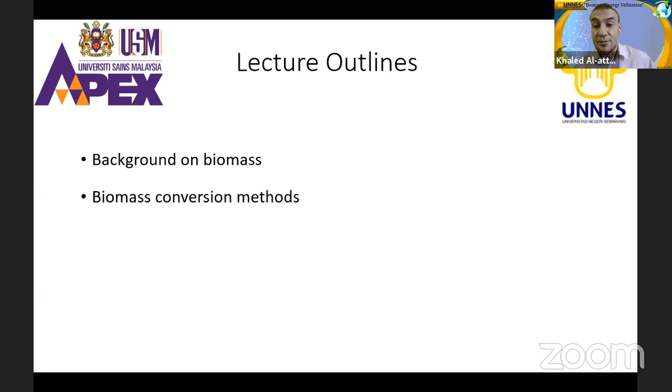So this lecture will include a general background on biomass definition, what is biomass. Then we'll have the conversion method, how to convert biomass into useful energy. Then we'll have the power generation from biomass. We'll discuss 2 ways to generate power, either using externally fired engines, which is actually the most common way to generate electricity from biomass, then the direct fired engines, which are usually not used or used for very small scale.

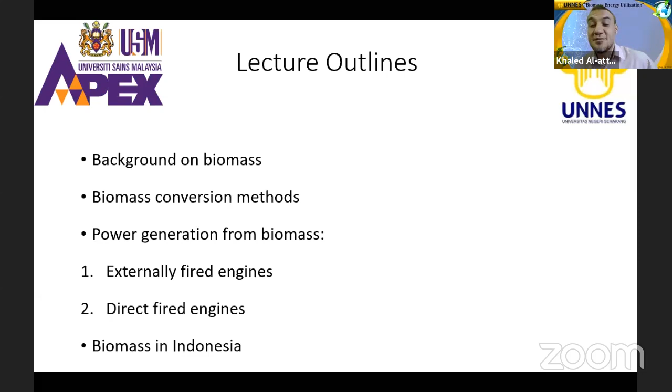Lastly, we'll have some background on biomass in Indonesia. I had a review paper with a lecturer from Indonesia, Dr. Jantar from Medan. The paper is still under review. So I got some information from that paper. So Bismillah ar-Rahman ar-Rahim. Let's start the background.

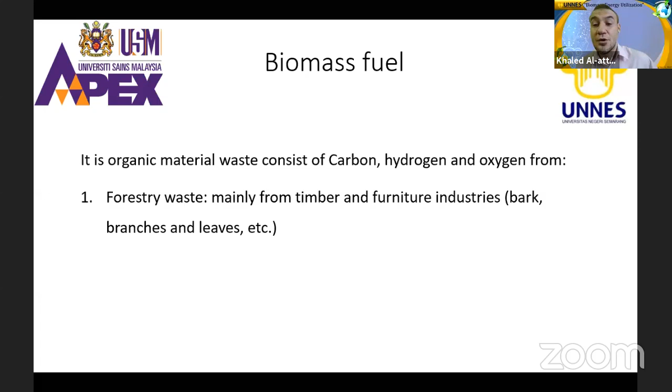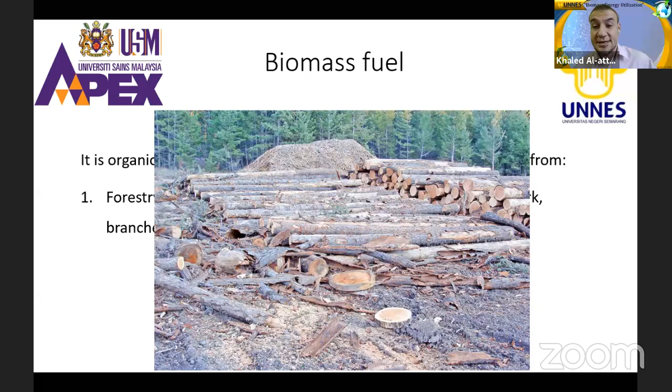So what is biomass? Biomass is any organic material, mainly consisting of three elements: carbon, hydrogen, and oxygen. The sources mainly are the forestry. You have many forests in Indonesia that help the furniture industry, timber wood cutting industry. So we have byproducts such as the leaves, the bark, the branches, usually cut on the site and not transferred. Only the wood is transferred. These waste materials are sometimes burned in open fire on the site, which is a big pollution.

Second source for biomass is agriculture waste from the palm oil industry. We take the oil, then we have the shell and other residues that are wasted. These are biomass waste, also from other industries like rice and sugar production. From sugar cane we have the bagasse. Bagasse is the dry fiber after you squeeze the sugar cane. And other agriculture industries have much waste that is not utilized. Sometimes it is burned directly to the ambient without utilization.

So the specific characteristics of this type, which is the forestry, it has very high cellulose and hemicellulose and lignin, which is very rich in oxygen. It's not like the normal fossil fuel. Normal fossil fuel, usually you have up to 90%, 80 to 90% carbon, and the rest is hydrogen, while oxygen is very few.

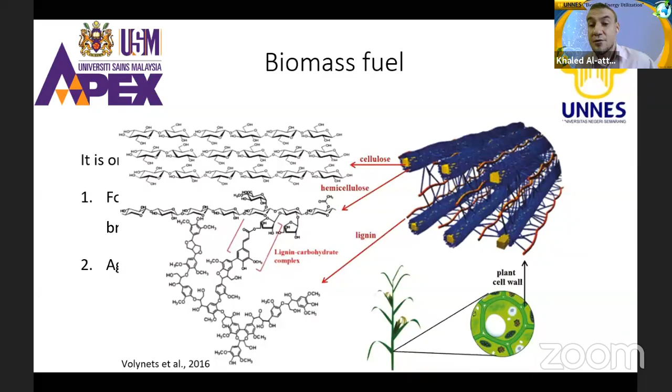In agriculture waste, it is a different story. The composition is quite different. You have very high sugar-based materials, such as cellulose and hemicellulose, which are very rich in oxygen. You can see here the links, you have many molecules of OH and O. So the oxygen is very high, while the carbon is low, from 40 to 50% only.

Then we have the third source, which is the animal waste. If you have a farm for raising animals, such as pig, cow, poultry, which is chicken, you have the waste from these animals in the form of manure or dung. This waste is very high, rich in hydrocarbon, which is carbon and hydrogen mainly.

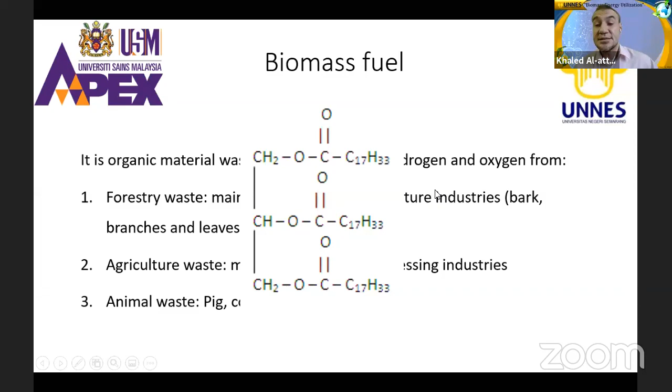You can see here the formula is different. It's not like the agriculture cellulose. Here we don't have cellulose. Cellulose is digested by these animals, so their waste does not include that. So the oxygen content is quite lower, while the carbon content from this type of waste is quite higher. We can see here, this chain is C17H33, a linear chain, so many 17 molecules of carbon, then up and down we have hydrogen. So the construction or structure of this waste is different from the agriculture waste.

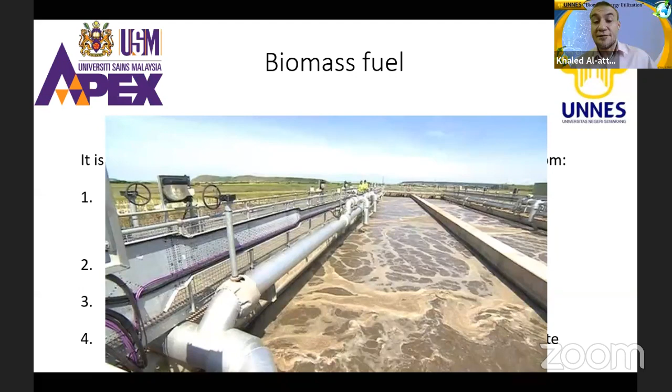Lastly, we have the human waste, in the form of sewage. The sewage is thrown with water, so it is very diluted with water. Then it is accumulated in the sewage treatment plant. This is a picture of a sewage treatment plant, where sometimes it is just left to evaporate with sun, or sometimes the water is pulled for water treatment, while the solid material is left to go down to the bottom and sink. After that, they collect the solid material.

The other waste we have is municipal solid waste. Municipal solid waste means any waste in your garbage. In your house, you put garbage outside. So this waste can be biomass or non-biomass. All that is called municipal solid waste, or waste from the city. It can be paper, metal, glass, plastic, or biodegradables like food waste.

So if you have recycling, you will make this utilization of biomass much, much easier. In developed countries, they focus on recycling inside, meaning in the building, in the house. You're not allowed to throw biodegradables, food, bones, whatever, mixed with plastic and with glass and with metal. You have to split. In developing countries, usually it is all mixed, then if you want to utilize it, you have to build an additional power plant or power station to separate them.

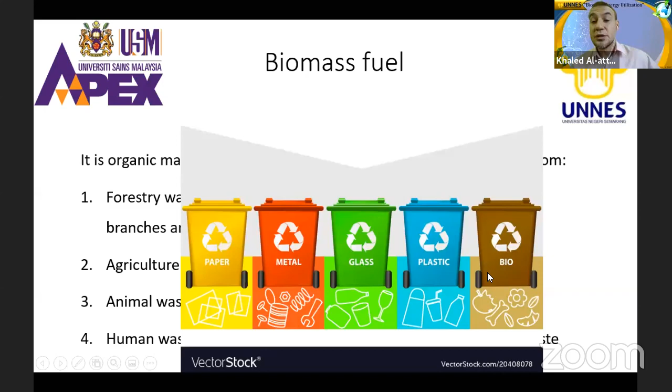So you have to separate the recyclables from the non-recyclables. Usually recyclables are the four from the beginning: paper, metal, glass, and plastic can be recycled, while the biodegradable can be utilized as biomass.

In most developing countries, we have landfill waste. We accumulate everything, just accumulate everything and put it in a landfill. This landfill is a big attraction for animals, rodents. You'll have rats, mice, cats, dogs, birds feeding there. If you have waste from a hospital, for example, this waste can be contaminated with virus and bacteria from hospitals. So whenever these animals go and feed there, eat the garbage, then they go back to the city, to the houses, and spread the disease.

So this is a very serious matter in terms of the environment, also in terms of health risk for the workers and for the areas around these places. You can see here, this is one of the landfills. Some countries bury the waste underground. Some countries burn it through open burning. Open burning will cause another issue, which is pollution from particulate matter, haze, and so on.

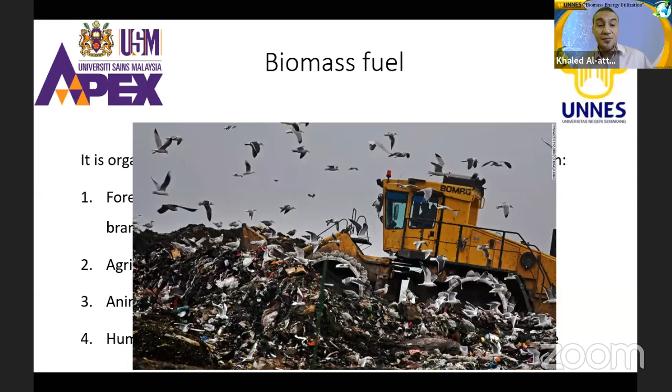So greenhouse gas and biomass, what is the relation? Is biomass good or bad? Is it good for the environment or bad for the environment? What's the relation between biomass and greenhouse gas?

Fossil fuels, as we mentioned, have high carbon content, so they generate more CO2 from combustion. It's usually 3 to 3.5 kilograms of CO2 per kilogram of fossil fuel. While in biomass, we have very low carbon content, 50%, 40%. So the amount of CO2 generated from burning 1 kilogram of biomass will be around 1.5 to 2 kilograms of carbon dioxide. Carbon dioxide is the major component in greenhouse gas.

Other gases also contribute, like methane and water vapor, all are greenhouse gases, but CO2 is the major one. So what is greenhouse? You all know, if you have a glass house in cold countries, they allow the sun to go into the house, then they don't allow the sun to reflect back.

So they keep the heat. They allow the sun ray to go in, but don't let it go out. This CO2 acts just like glass. It allows sun rays to go inside Earth, then when this sun ray or energy is reflected from Earth, it is not allowed to go back to space. So it is trapped inside the Earth, increasing the temperature of the world. You've probably heard about the global warming effect.

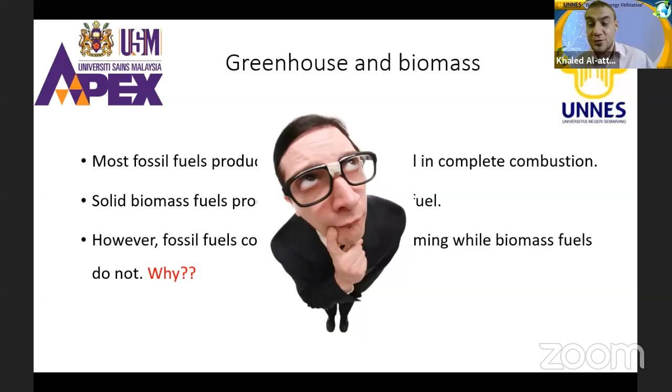I don't think we have time for an interactive lecture, so we'll just answer the questions directly. This is confusing: why does biomass not contribute to greenhouse emissions while fossil fuel does contribute, when both generate CO2 in combustion?

We can see the photosynthesis process is like a factory inside the tree. Every leaf of the tree has a factory that converts CO2 into carbon. Humans can do something like that too, with the Boudouard reaction to convert CO2 into carbon, but you need a lot of energy. The tree takes this energy from sunlight. This is called photosynthesis.

Whatever carbon dioxide, CO2, is in the air is taken by the tree and converted into carbon. This carbon is basically the fruit or the wood. This fruit or wood can be eaten by animals, then they burn it. Everybody has engines, millions of engines inside the body, that convert this fuel, biomass fuel, into energy, and the exhaust is CO2 again.

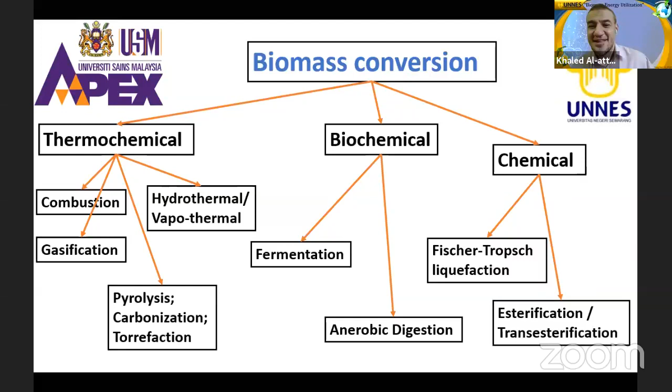Okay, am I going okay? Should I increase the speed or reduce the speed? Okay, the rate is okay.

First one is combustion. This is a thermochemical process, meaning we have heat and we have chemical reaction—both are needed for this process. But this one needs an additional agent, which in this case is air doing oxidization. So the chemical reaction here is known as combustion. Combustion is a special chemical reaction to convert biomass fully into carbon dioxide, CO2, and water. So this is full combustion.

However, biomass fuel has a problem when it comes to combustion. It's not like high-grade fossil fuels. So what are the issues when we want to burn biomass? First issue is the high moisture content. Biomass usually—if you have wood, wood is the driest, but still it has nearly 20% or 15% moisture. Other biomass has up to 90% moisture, which is extreme. So usually if you have like 90%, you cannot burn at all. You have to dry first, then you can burn. Why? Because water will take all the energy and you don't have any combustion.

Another downside is the hygroscopic behavior, meaning biomass, even if you dry it, tends to absorb moisture from the air. It's not like other materials that, once dried, keep the moisture as is. Biomass, if you dry in an oven then put it in the air for one day, it's already wet again. So it absorbs moisture from the air. This is another downside.

Another downside when you want to burn biomass directly is the low energy density. This includes the heating value being low and the volume being large—this is the relation between heating value and volume. So for a very large volume, you have very low energy. It's not like coal: 1 kilogram of coal can give you like 25 megajoules, while 1 kilogram of biomass could be from 10 to 19 megajoules.

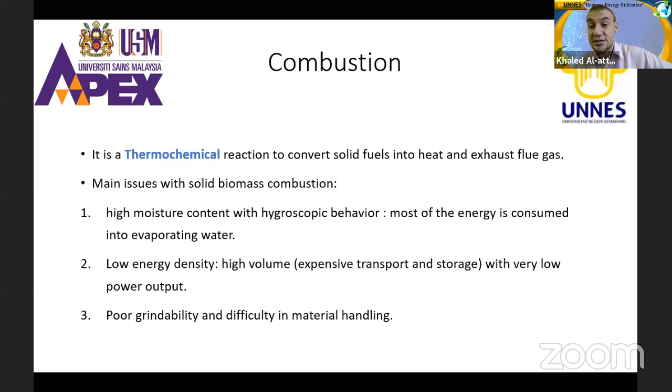Okay. The second process is pyrolysis. This is also a thermochemical process, but in this case we don't have any agent, just heat and chemical reaction, no agent at all. So you can do this one in vacuum. You can do this one in inert gas like nitrogen or helium that doesn't react. So pyrolysis is a decomposition. Mainly, if you put biomass and you heat it, it will decompose.

So pyrolysis has different types depending on the temperature and the time. The common one is slow pyrolysis, which is counted in minutes. If you have low temperature, 400 degrees Celsius, you will have carbonization. If you have less than 400 degrees, you will have torrefaction. But if you increase the temperature to 600 degrees, you start to decompose biomass into gas and oil. This oil is known as bio-oil. Okay, so pyrolysis does not need any medium. It can occur just with the biomass and the heat.

No medium required. Other novel types are fast pyrolysis and flash pyrolysis. Fast pyrolysis is from half a second to 5 seconds, mostly generating gases and oils. Flash pyrolysis is less than 1 second, meaning you drop biomass in a heater with very intense heat, and it volatilizes instantly and changes into gas. So flash pyrolysis is a continuous process. You just pass biomass and it devolatilizes directly into gas.

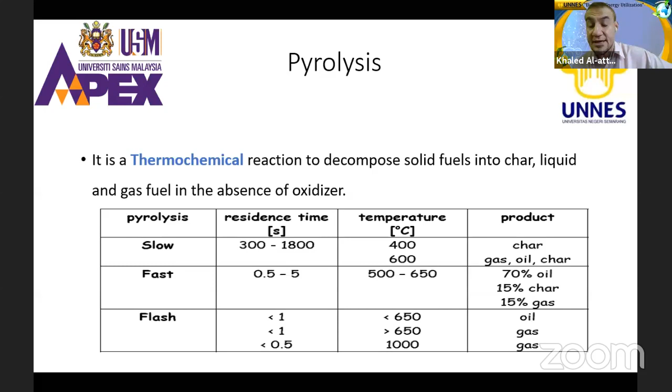Then we have the subcategory of pyrolysis, as we mentioned before, which is torrefaction. Torrefaction is a way to upgrade biomass. We saw before the downside of biomass is low energy density and high moisture. If you want to upgrade biomass into a good quality fuel, but it's still not charcoal, it's still between charcoal and biomass, you do something called torrefaction.

So torrefaction is a slow pyrolysis, but with very low temperature. You need only 200 to 300 degrees Celsius for an extended time. No atmosphere, no oxygen. You don't want oxidization. You can have nitrogen or helium or just a vacuum or a closed chamber. Then you'll have torrefied wood, which is a brown wood. It's not black yet, it's brown color.

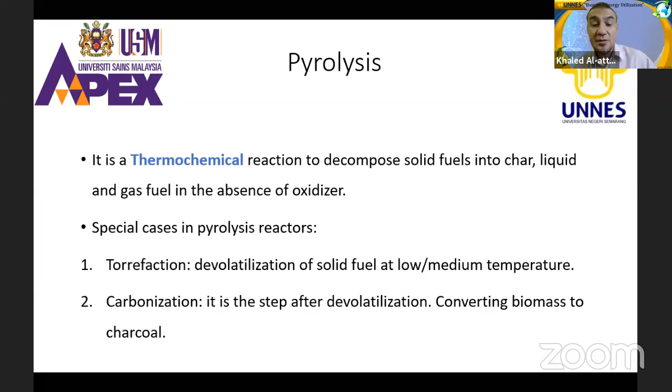Then you have carbonization, which is the charcoal production. You have many factories to produce charcoal. So charcoal production is a slow pyrolysis process at around 400 degrees Celsius up to 500 degrees Celsius. You don't have any medium. You cannot introduce air, otherwise you have oxidation and combustion. So carbonization is the next step after torrefaction.

Gasification is the most common way to convert biomass into useful gas. That's why the name is gasification, meaning you convert solid to gas. So gasification is also a thermochemical process, but it has an agent. The agent could be air, oxygen, or another type of agent such as steam or CO2. That's why in some papers you have confusion. Some researchers call CO2 gasification pyrolysis. They don't call it gasification, because what is the line between pyrolysis and gasification?

Gasification, some people call it partial oxidation. This is only if you use oxygen or steam or air. But if you use other agents, it is stepping towards pyrolysis. So if you use CO2, you have a reaction called the Boudouard reaction that converts CO2 with biomass into a gas. This gas is known as producer gas or syngas. Syngas is the synthesis gas. This was first introduced in the early 1900s.

They did coal gasification. So syngas is basically hydrogen and CO, carbon monoxide. You have diluted syngas if you have nitrogen and CO2 added. But producer gas is a special case of syngas, which is diluted syngas from biomass gasification. Okay. So when air is used, you introduce nitrogen. Nitrogen is not combustible, so you dilute the fuel, and the fuel quality becomes very low.

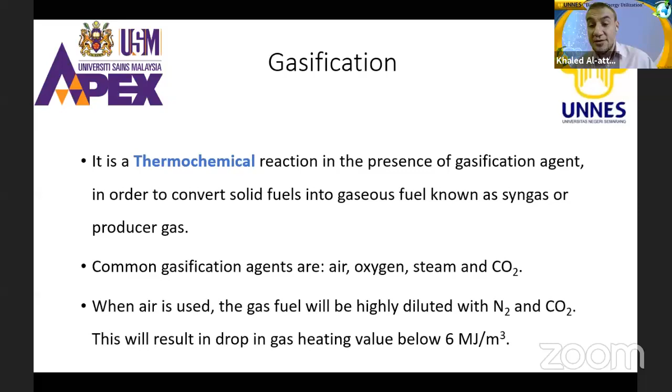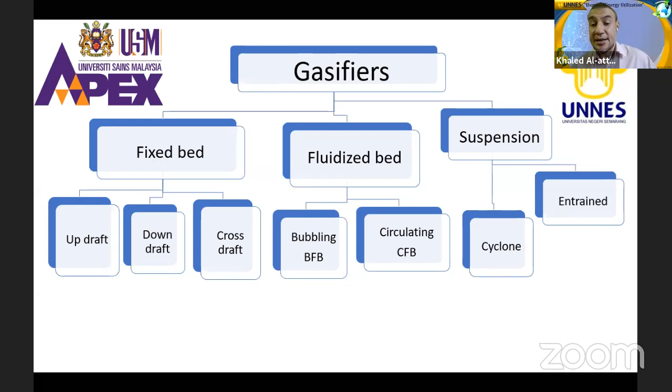Okay, so the gasifiers: we have the fixed bed, which is the batch type. We have updraft, downdraft, and crossdraft. We have fluidized bed, which is a moving bed with continuous feeding of fuel. It's not batch type. Then we have the suspension, which is either cyclone or entrained, for large scale coal gasification.

So we can see here the power scale. For fixed bed, downdraft gasifier is the most common with IC engines, since the gas is clean; it has low tar and contamination. So it's usually used for IC engines, internal combustion engines. So downdraft is between 10 kilowatt up to 1 megawatt. Then updraft has high tar content, so it's not useful for engines, but it's useful for boilers. So you can have heat for a boiler. So it is usually in boilers, large scale, 1 megawatt to 10 megawatt.

Then you'll have the fluidized bed. It is a very high energy density device, so it can be small, but very high energy. Fluidized bed can be circulating or just bubbling fluidized bed. So you have a sand bed, then you blow the air, then everything starts to bubble like boiling water and mix the hot sand with the biomass.

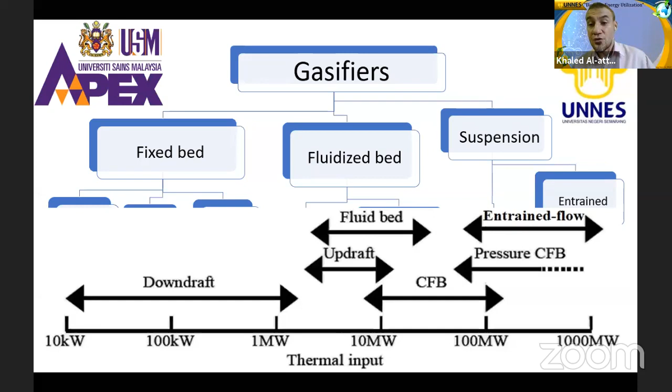Then you have the entrained gasifiers, usually only for coal gasification with very high intensity. So in this case, you use pulverized coal, like powder-shaped coal, and you throw it in with very high intensity.

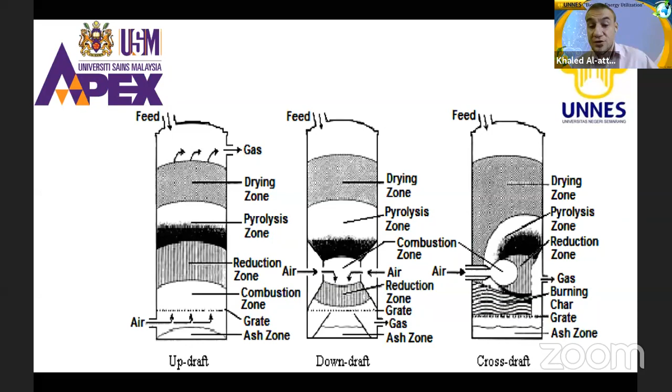So this is the reaction inside a downdraft gasifier. You have the biomass. You dry the biomass first, then you will have the vaporization from the biomass, water vapor, and you have the air. So whenever you introduce the air, you will have the combustion zone. So the combustion zone is just a generator for heat. It generates the heat for the other zones.

So the gasification zone takes heat from combustion and takes some oxygen. The pyrolysis zone takes some heat from combustion, but doesn't have any leftover oxygen. Drying takes the least heat and no oxygen. So all take from the combustion zone. So this is for downdraft air gasification.

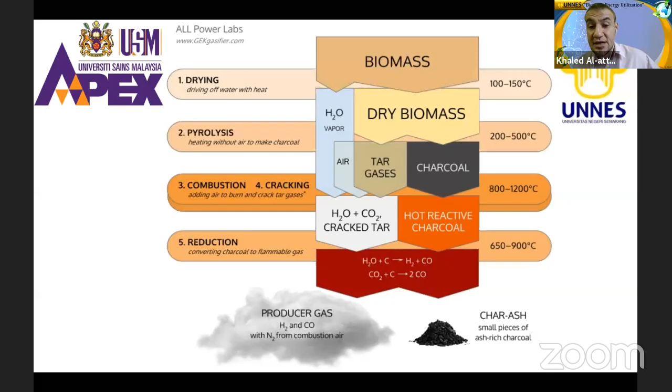Okay, biogas is the biological or biochemical conversion. It is anaerobic, meaning not aerobic, meaning no air. You just put waste food or waste from animals, manure from cow or from chicken, and you store it and let the bacteria do their work. So it converts into biogas. It can be a batch system, a simple container underground; you put all your waste in and you shut it for a month. Then you open it, and you'll have biogas there. It is cheap, but it is not efficient.

Or you can have continuous feeding with tanks and stirrers and so on. You can have different bacteria. If you run between 20 to 40 degrees, you will have lower efficiency. If you run between 50 to 70 degrees, you have a different type of bacteria with higher efficiency. Then you'll have either single stage or multiple stage. Commonly now they have multiple stage continuous flow with many temperatures, so you can utilize different types of bacteria.

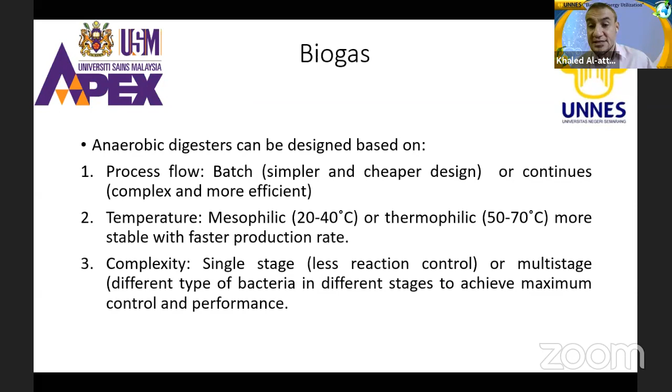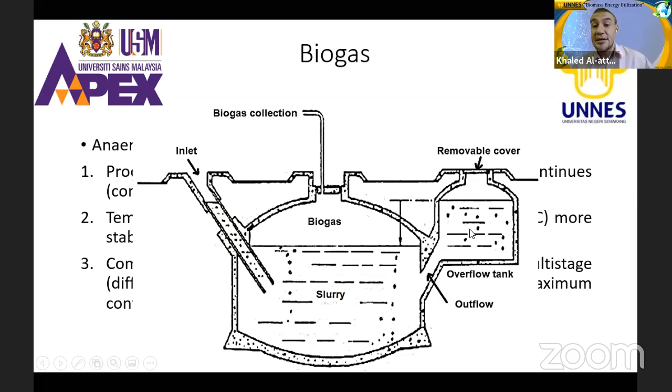So we can see here, this is a simple batch type digester. You put the waste in from here and you close the cover, then the bacteria start to work and convert it by fermentation and by degradation. Digestion is just like in your stomach. So bacteria generate biogas, which is mostly methane. Then the manure or the leftovers can be used as fertilizer for the plants and for soil. Biogas has a problem: contamination with hydrogen sulfide, which is corrosive.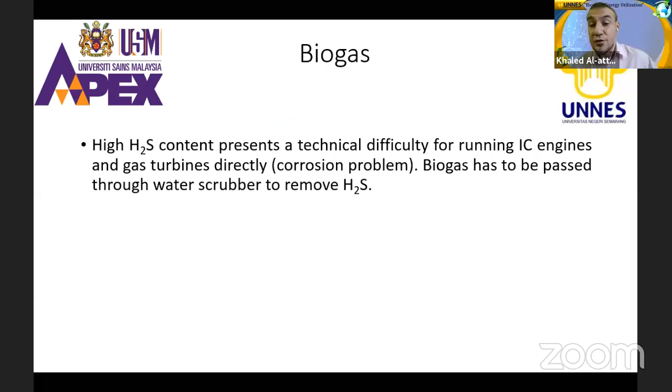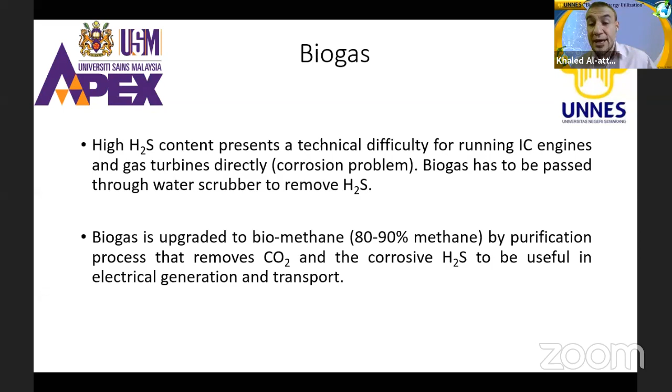So you have to clean hydrogen sulfide first before you can use this gas in an engine. Also, it has CO2, so you can absorb CO2 using lime or other methods. So you can upgrade the biogas into biomethane. Biomethane is the upgraded form of biogas, so it can be used directly in an engine.

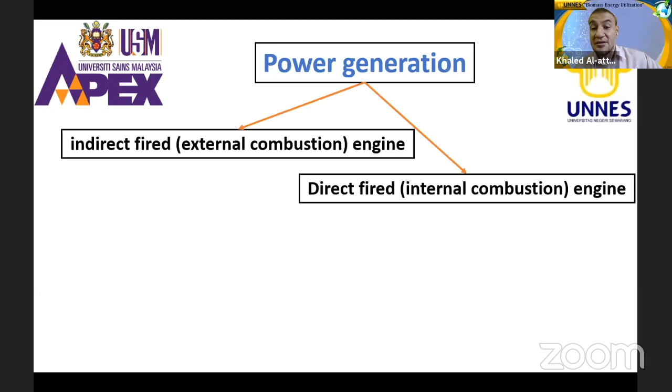Power generation: we have direct firing and indirect firing. So indirect, or externally fired engines, and direct, or internal combustion engines. In externally fired engines, we have the steam boiler. It is the most common externally fired engine for biomass. Like 90% of the biomass utilization in the world is steam. Very rarely do you find other types.

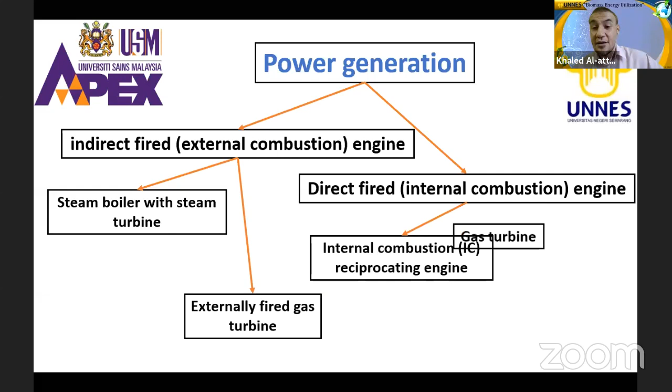Then you have the externally fired gas turbine. This is nonexistent, only prototypes and pilot scales. Then you have direct firing in an IC engine with a gasifier. Then you have gas turbine direct firing. Okay, so externally fired engines, you can see here we have a furnace. It's not a combustor, it's a furnace, it's atmospheric, it is simple, it's like a boiler. Then you have the tubes and you heat them by biomass.

So this medium could be steam, could be air. If it is steam, it is called the Rankine steam cycle. If it is air, it is called the externally fired gas turbine cycle. Same idea. So you increase the enthalpy of the fluid, then you expand this fluid in a turbine. This turbine could be a steam turbine or a gas turbine. Then if you let the gas or the fluid out, it is called an open cycle.

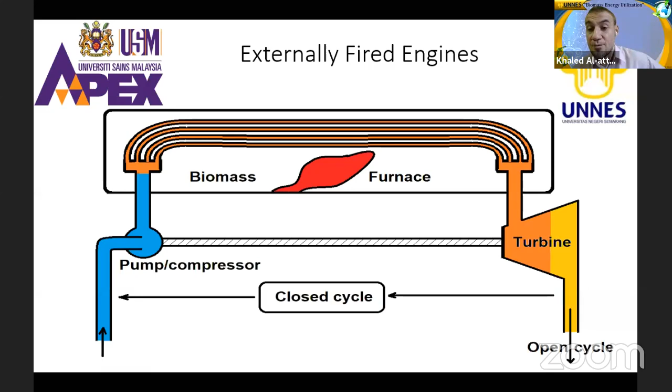Steam cannot be let out, so steam is a closed cycle. You recycle the steam back, using a condenser here to cool it back down to water. Then you have a pump. This pump takes the energy from the turbine, either directly with a shaft or indirectly with electricity. So in a steam cycle, we have a pump. In a gas turbine cycle, we have a compressor because we compress air. So this is the externally fired engine.

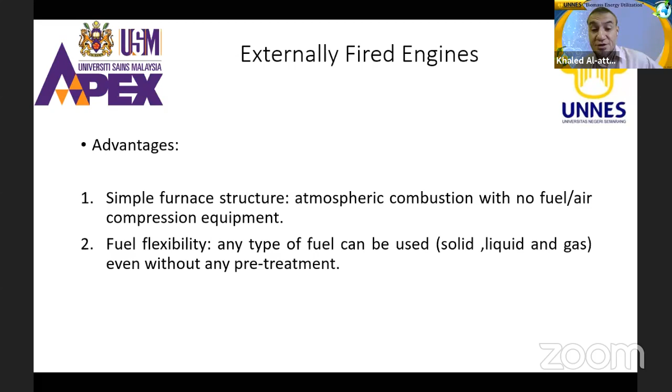The advantage of this engine is that it is a simple atmospheric furnace that can use any type of biomass. Even non-treated biomass can just be thrown in the furnace and burned. So it's a very simple type. No compression for the fuel, no injection, no automation, nothing. Then you have fuel flexibility, which we just talked about. Then both open and closed cycles can be used. The closed cycle has the advantage of pressure.

In steam, you can utilize the pressure using the closed cycle. You don't have atmospheric pressure, so you can do a very extreme vacuum inside the turbine to utilize more pressure. And in a closed cycle you can reach much higher pressure since you are not bound to atmospheric pressure. Once you have high pressure, the equipment always becomes smaller. High pressure means low volume. So you can have a smaller turbine in a closed cycle, while in an open cycle you cannot.

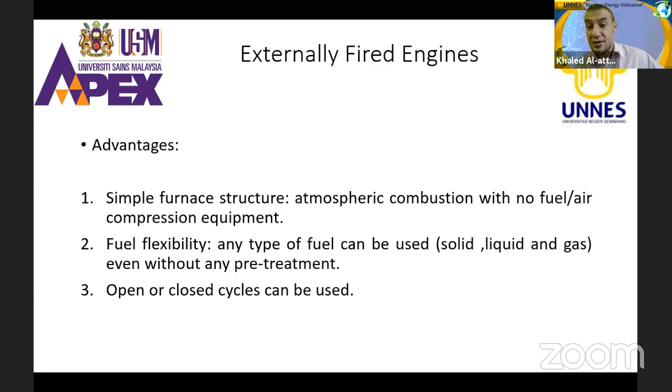The disadvantage of the open cycle is that the temperature is limited. For the externally fired gas turbine, this is a problem since a gas turbine needs high temperature, above 1000. But with an externally fired gas turbine, you only get 700 to 800, which is very low. But for steam it is not a problem. Steam is usually at most 500 degrees Celsius, and you can get that easily with a boiler. So this is not an issue for a boiler, but an issue for a gas turbine.

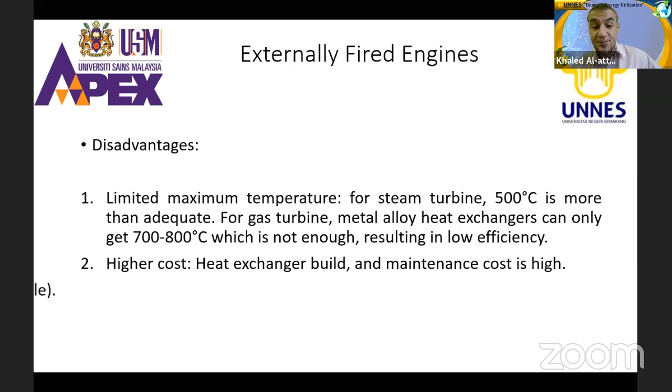Then you have the high cost of the boiler, of the heat exchanger. Then you have the safety concern. If you have a boiler, you have to call DOSH, the Department of Safety, every year. You cannot live happily. You have to have your boiler inspected every year. So it is a safety concern. Once you have a high pressure boiler, you have to call DOSH, the Department of Safety.

Then lastly, this is not practical for small scale. It is usually above 100 kilowatts at least. Steam boilers are usually not efficient at small scale. So for small scale, we can use the other type, direct firing.

So the externally fired gas turbine, this is my baby at USM. I started with this one back in 2005. I did my master's on this one. We got very low temperature and we couldn't start the turbine, so it was a failure. Then in 2014, a PhD student came. I was supervising him. He built a 6-meter high heat exchanger and he managed to get 860 degrees Celsius air temperature.

And the turbine successfully started, but you can see here the installation. This is a 6-meter high chimney, then a 2-meter system, then 8 meters, the whole thing. Every time you want to install it, you have to call a very big crane there.

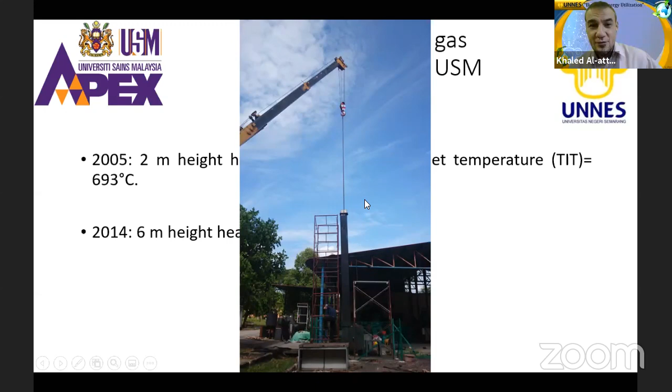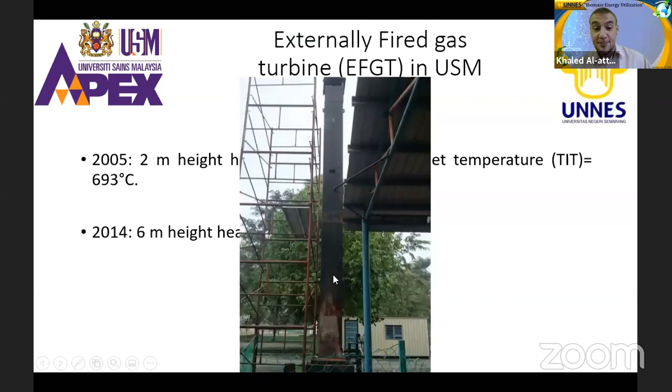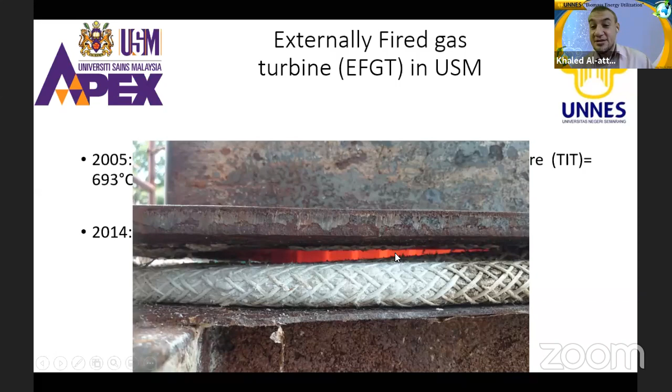So this is the system. It is a gasifier combustor system with stainless steel heat exchanger, which is 6 meters high. The temperature is very high. You can see here, we left some space for the turbine to go free, so the heat exchanger can expand. But still, you can see here, the heat exchanger is red hot, so it pushes the chimney up. It expands very high. Unfortunately, at 870 degrees, this heat exchanger melted.

So this is the downside of externally fired gas turbine. It is very expensive. It is still in pilot plant. Nobody is doing this one because it's a very expensive business. So we have to redo this part again.

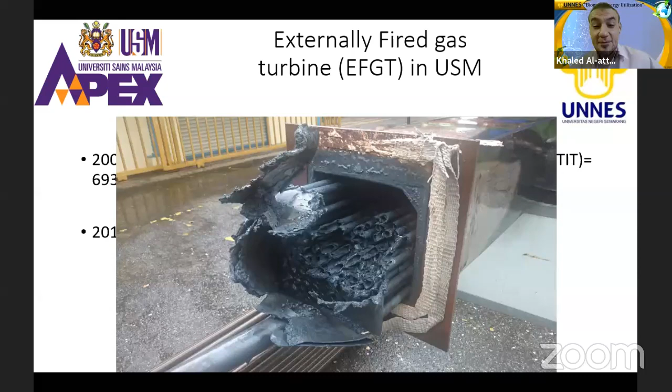So in 2018, another master student came and we did a new idea, which is called humid air turbine. It means we combine both externally fired steam and air. So you inject steam and you have air. So both will give you energy. Steam has the advantage, it doesn't need very high temperature. So a combination can work. So far, still not very successful.

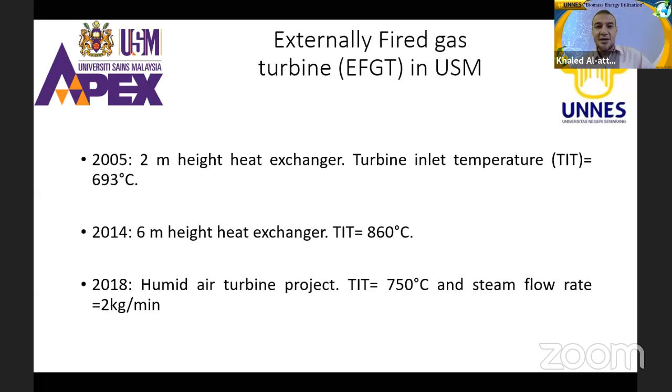It's a very difficult project.

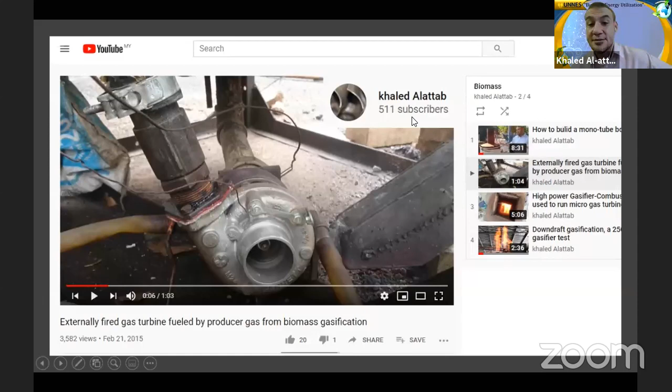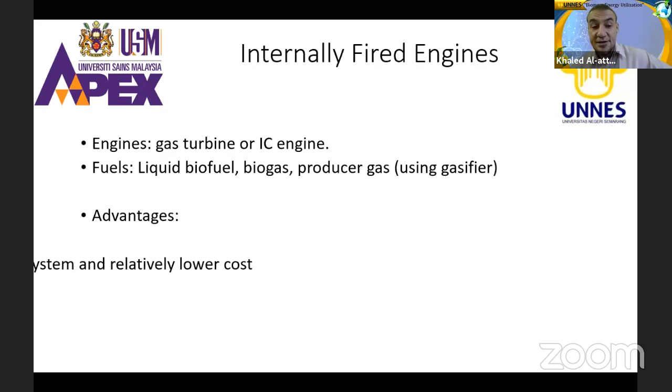Internally fired engine can be with IC engine or gas turbine. So the fuel could be very flexible, liquid fuel, gas fuel, or biogas. So advantages, it is a compact system with low cost. It is more suitable for a small size. So we have in USM this type.

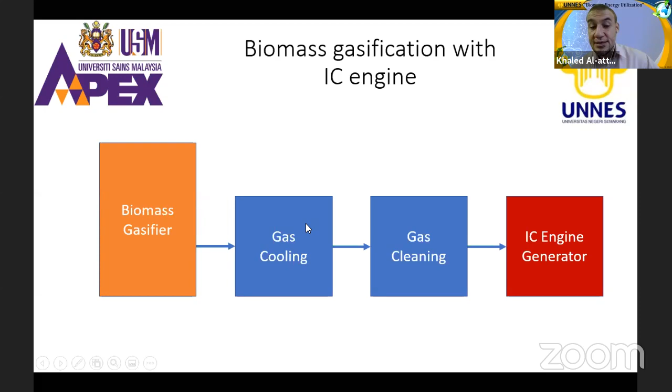We built in USM. We have a gasifier, then you have the gas cooling, then you have the gas cleaning, then you have the engine. For the engine, usually the gas enters at 40 degrees Celsius and we clean it from tar first. So it has elaborate gas cleaning and gas cooling before the gas can run the engine.

So we have a commercial offer in USM, a 5 kilowatt system ready for order if you want to order. Also, for lab demonstration, we can build for you a 5 kilowatt ready system, downdraft gasifier with the cleaning and cooling system and the engine.

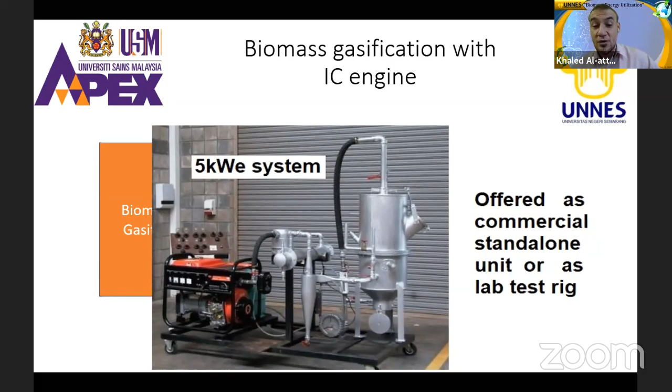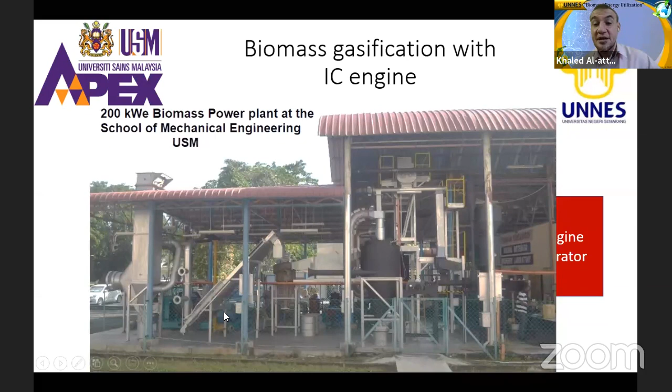Also, we have a biomass power plant, still not running yet. It is a 200 kilowatt power plant. It has 3 gasifiers. And this is a very elaborate cooling and cleaning system you can see here. Then we have the engines, 200 kilowatt engines.

So the more economic type is to pressurize the gasifier. It means you pressurize the air, clean air. You don't pressurize the fuel because the fuel is contaminated with nitrogen. So it will not be economic for you to pressurize the fuel. So you pressurize the gasifier.

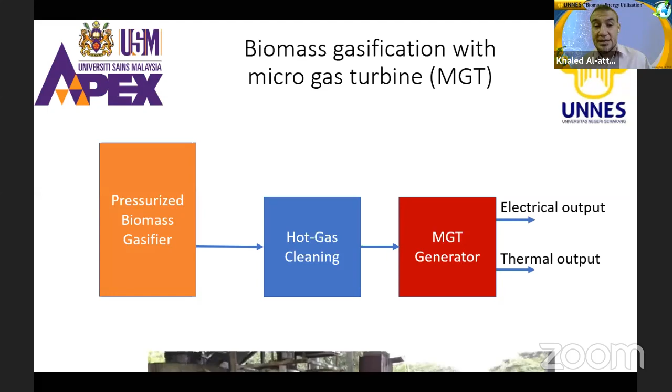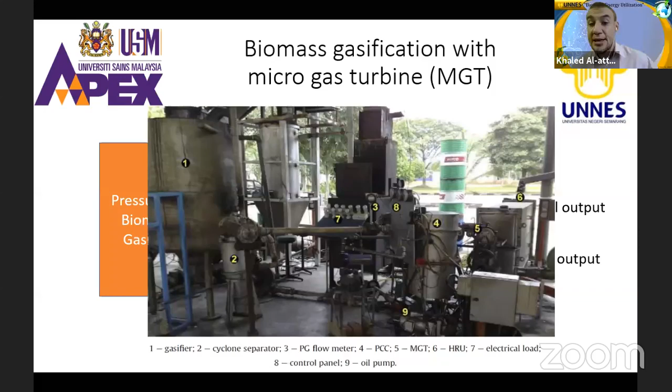This is a system built back in 2008 using pressurized downdraft gasifier and two-stage micro gas turbine with a cyclone separator and heat recovery. So this one was a pilot plant, 1 kilowatt electricity and 35 kilowatt hot air.

Then you'll have biomass direct firing with IC engine with liquid fuels. We have many engines running in the IC engine lab. I don't have pictures. Also, we have a micro gas turbine running with liquid biofuels.

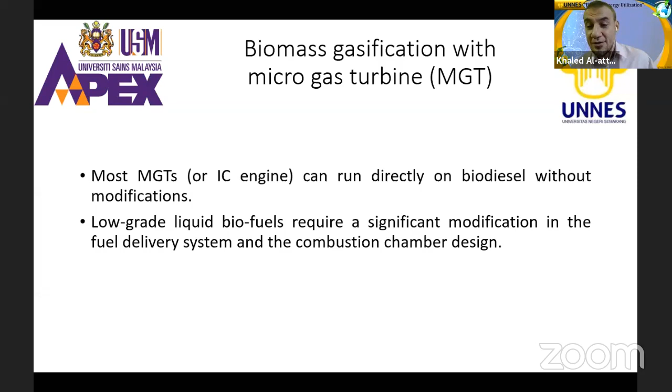It's much easier. You don't have to convert to gas or anything. You just use the liquid fuel directly. So the liquid biofuel usually does not need significant modification on the chamber unless it is low grade. So you have to modify the gas turbine or IC engine chamber to cope with the higher viscosity. Usually these lower grades like palm oil have very high viscosity, so you cannot pump it and spray it easily.

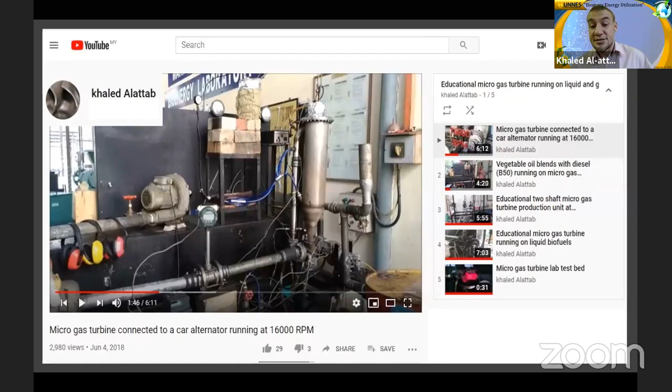This is another project finished last year by a PhD student. He did liquid biofuels with a microgas turbine engine. You can see it on YouTube. We managed to run 100% palm oil fuel with this gas turbine engine. So you can go to my channel and watch the different experiments with this microgas turbine engine.

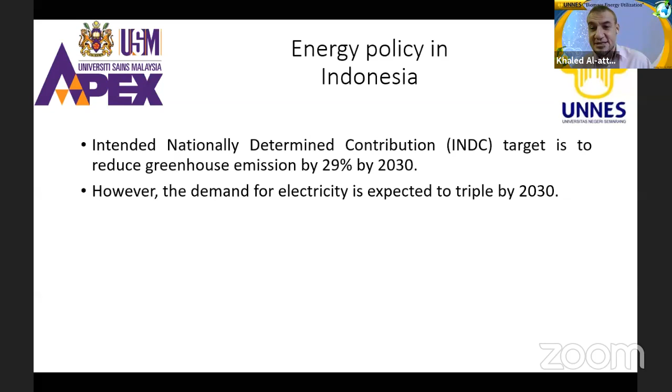Okay, so how to achieve this target? You can see here, the electricity demand with the population is increasing very fast. Some researchers say that by 2030, the electricity demand in Indonesia will be tripled, three times the electricity demand as now. So how to reduce CO2 emission while the electricity demand for power generation is increasing? You can refer to the Energy Outlook of Indonesia 2019, this is the link, or the Statistical Yearbook of Indonesia 2019 for the statistical data.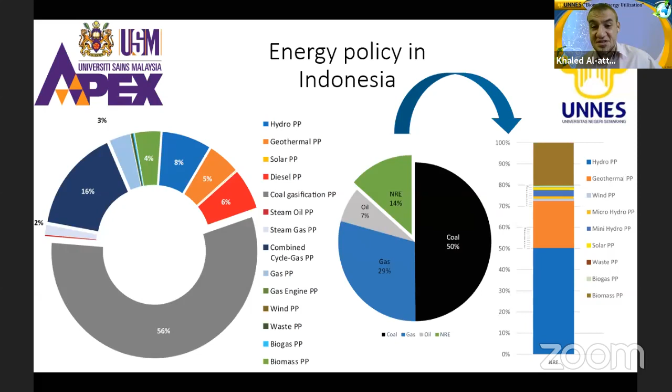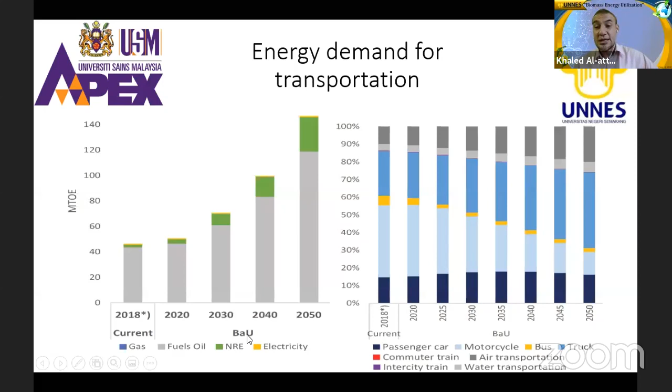So these guys in Indonesia Outlook did simulation and they simulated 3 cases. The first case they call business as usual, BAU. So if you keep doing as you are now, this is the result. Then they simulated other cases, low carbon case and sustainable case. If you go with the low carbon case, change the policy, you can achieve this target of 29% CO2 reduction by 2030. If you keep the business as usual model, it's not expected that Indonesia can achieve the greenhouse target.

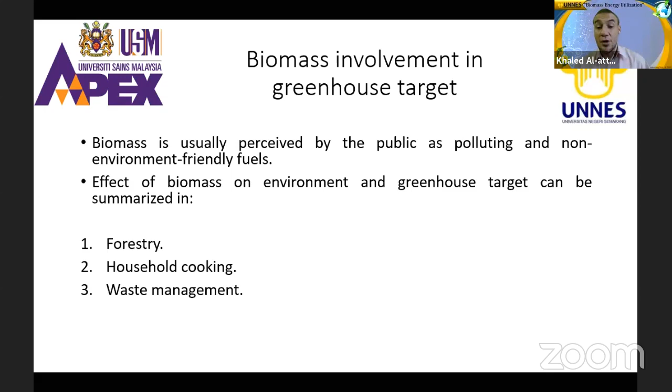So on biomass and greenhouse, the public usually views biomass as a dirty fuel. Biomass is misused, not used correctly, so it is a dirty fuel. But if you use it correctly, it's not a dirty fuel. It's a very environment-friendly fuel. So the issues with biomass, we have here the effect of biomass on greenhouse. We have forestry. You have household cooking. You have waste management; we already talked about the landfill and so on. Then lastly, we have liquid biofuels and power generation.

So forestry, as we mentioned before, if you cut forest, you increase the CO2 in the air because you reduce the number of engines that can convert CO2. So you increase global warming by reducing the forestry. By 2014, one study showed that 60% of Indonesia's greenhouse emission was contributed by forestry, the cutting of the trees.

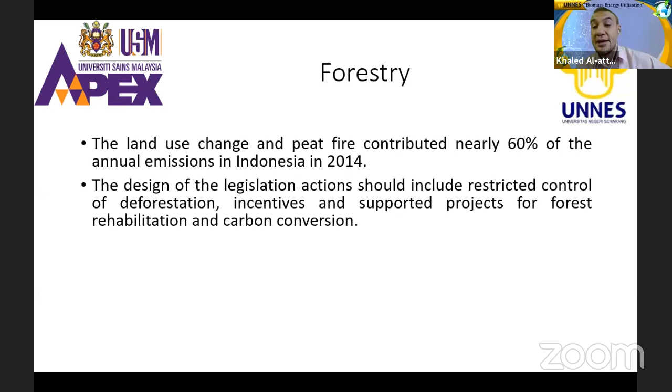Any action by the government should include a design of rehabilitation of the forest, banning the illegal cutting of the forest, and also the intentional burning of the residues of the forest. Then you'll have other suggestions by researchers. Mangrove forestry has 3 times the density of carbon compared to other forestry.

If you cut the tree but store it as a building material for a house, it will remain there for 70 years, so you store carbon for 70 years. This is a negative reduction of CO2, meaning biomass in this case is not neutral, zero, it is negative, meaning you reduce CO2 in the air by storing carbon.

So how to store carbon? One of the ways is to store it in wood.

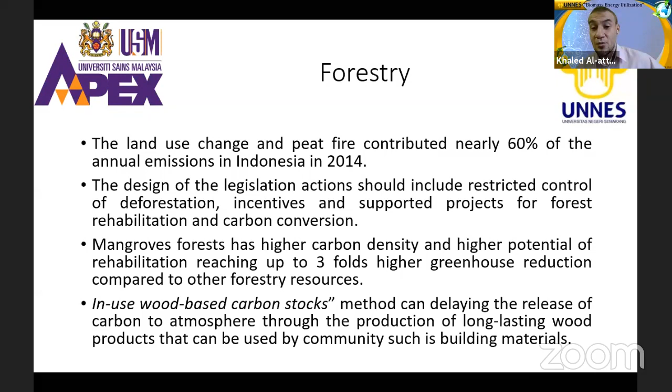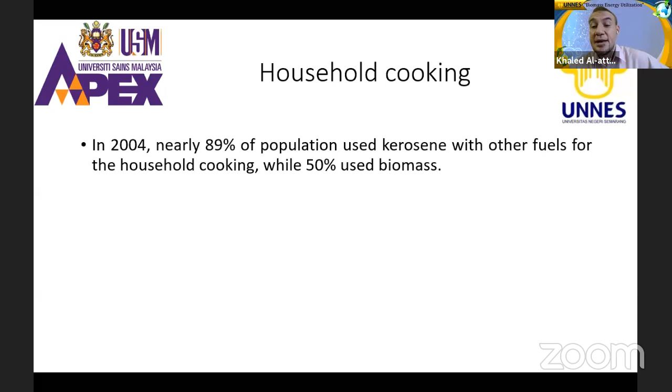Household cooking: early in 2004, 89% of the population used kerosene mixed with biomass open burning stoves. Then the government introduced, in 2007-2008, this campaign to promote LPG. They distributed stoves and gave free LPG to reduce the health risk from the residues and smoke of biomass open burning in cooking.

Another campaign: this LPG campaign increased usage from 10% all the way to 47%. And kerosene used for cooking reduced from 36% to just 9%. Programs such as biomass cooking stoves, also initiated by the government, were not successful.

So what to do? You can see LPG stove is a good move. It is clean fuel. Also, if everybody has an LPG stove, you can later on introduce biomass fuel as a pipeline, so biogas or biomass can be introduced to the house as a pipeline, and then you can use your own LPG stove for cooking.

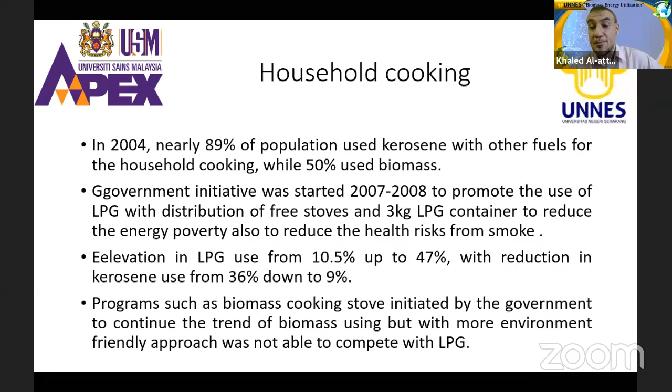So a mid-stage is LPG stove as a good move. Then you can introduce higher technology of biomass gasification using pipelines inside the house.

Liquid biofuels: in 2006 there was an initiative, the National Biofuel Development Team, TimNas BBN, which was initiated so the target is to increase the contribution of liquid biofuels in Indonesia. By presidential regulation, we have the target for bioethanol, which comes from fermentation of sugarcane or other materials into ethanol. Bioethanol mixed with gasoline is used for cars, buses, trucks, or whatever. The regulation target is to reach 20% ethanol and 80% gasoline by 2025.

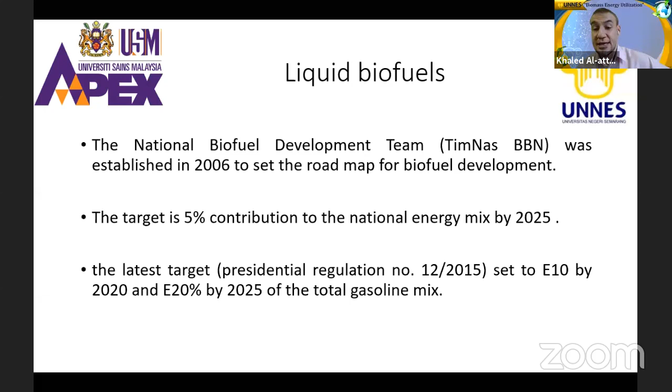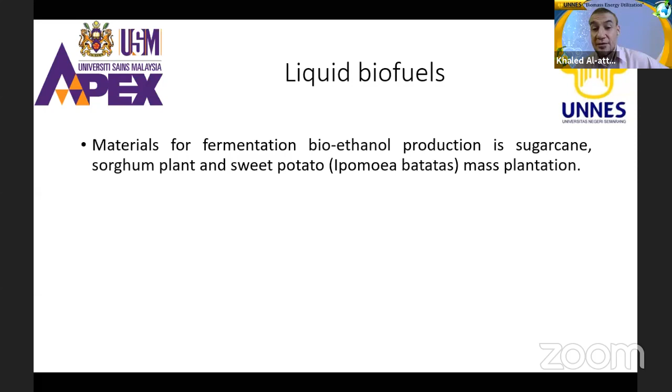So for liquid biofuels, materials for bioethanol are usually sugarcane, sweet potato, and other materials. For biodiesel, it's different - it uses palm oil. It's not fermentation, it is chemical transesterification, a different process. You have palm oil, or non-food grades like jatropha and rubber seed.

So you avoid the conflict between food and fuel. If you want to increase the target for liquid biofuels to cover cars in transport, you have to plant more palm oil and rubber seed. But the issue is you cannot use forestry land to do that, otherwise you will have a negative effect on CO2 and greenhouse gases. So you have to find other free lands to plant extra plantations for the liquid biofuels industry.

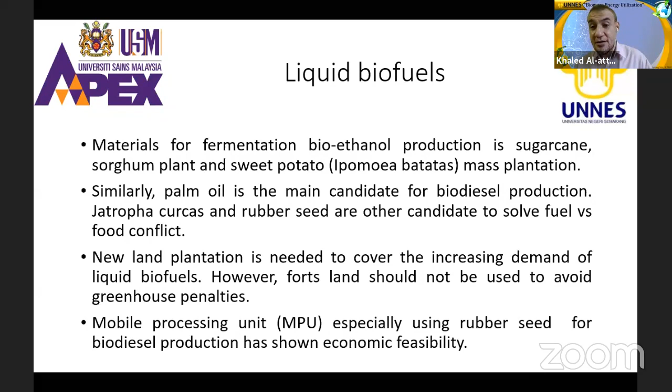This research proposed mobile processing, studying the economic feasibility of a small mobile station on a car. These people go from village to village collecting rubber seed from farmers, then producing biodiesel, then selling the biodiesel back to farmers to run their diesel engines. They found this to be economically feasible with a small transesterification transport unit moving and distributed in the villages, so they don't have to collect the biomass and transport it - they convert it on site.

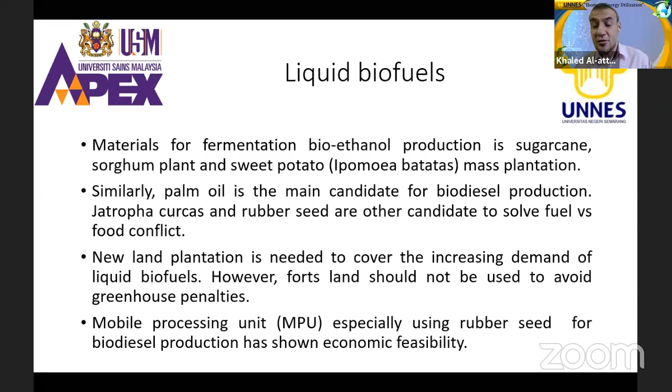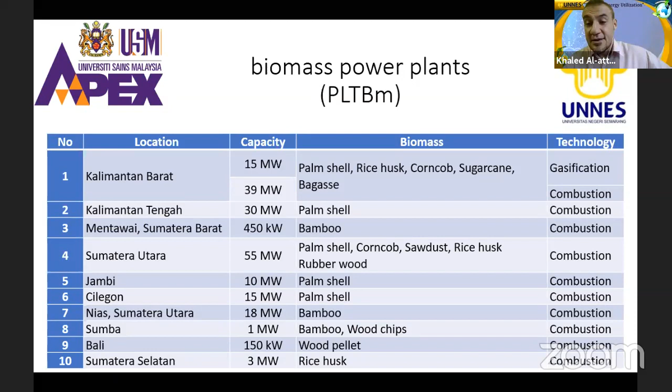Okay, thank you. We can open for Q&A.